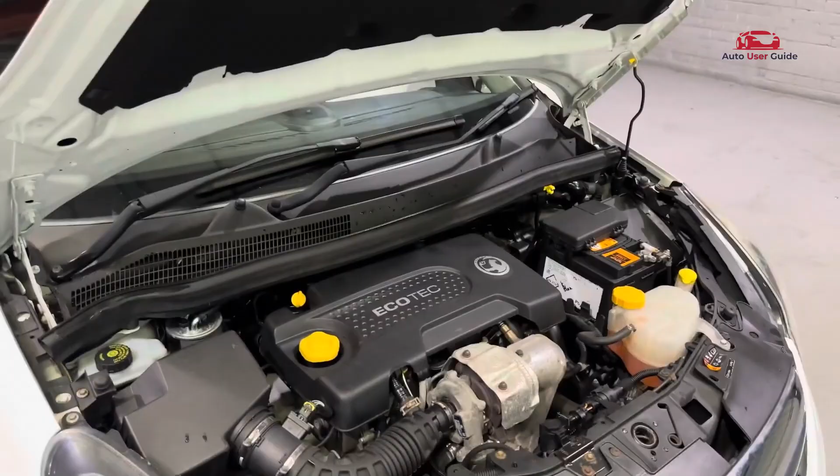Curious about the fuse box location and diagram for the Opel Corsa 2015 to 2019? Wondering where each fuse panel is and what its functions are? This guide answers all your questions, helping you easily locate and keep your car's electrical system safe and running smoothly.

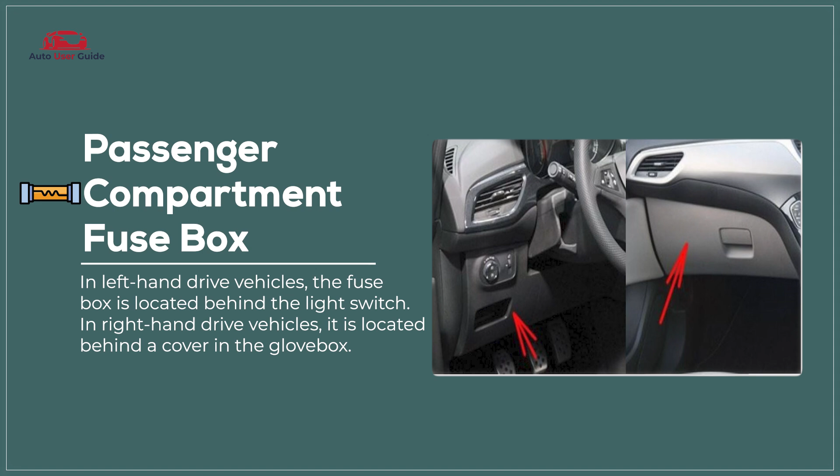Passenger compartment fuse box. The passenger compartment fuse box in the 2015 Opel Corsa controls and protects interior electrical systems such as power windows, infotainment, and climate control. It ensures consistent power delivery and reliable operation of cabin features.

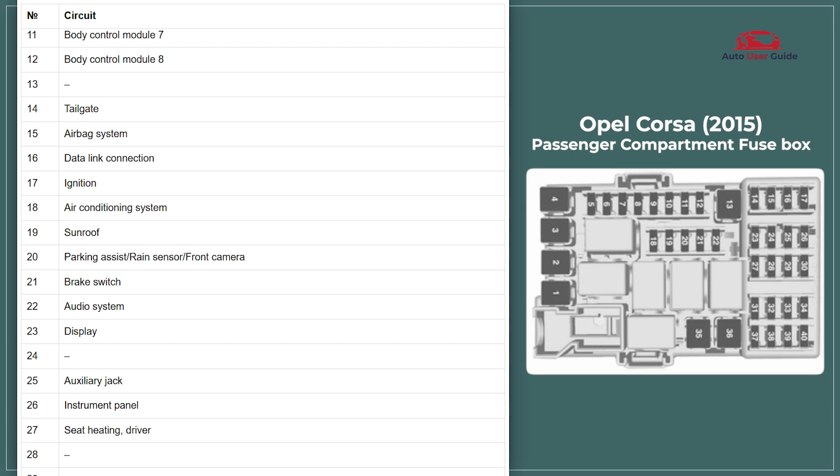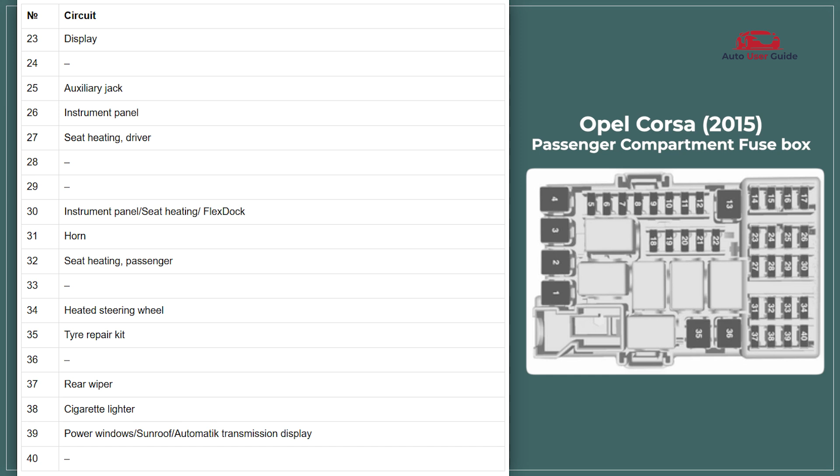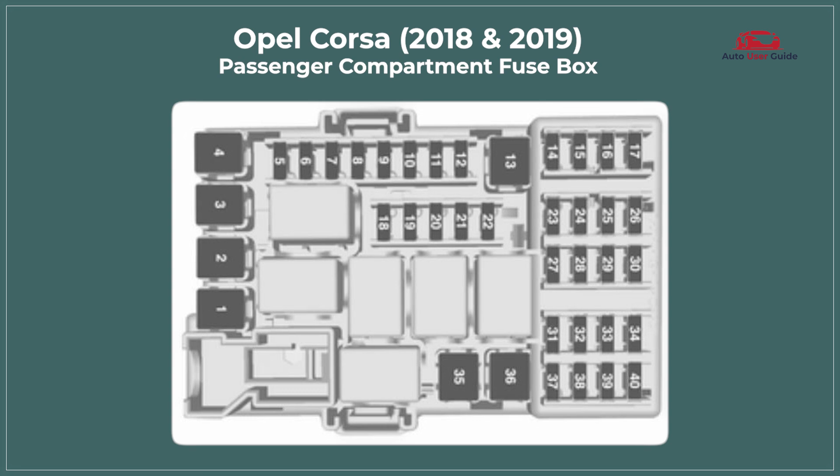The passenger compartment fuse box in the 2018 and 2019 Opel Corsa controls and protects interior electrical systems such as power windows, infotainment, and climate control. It ensures consistent power delivery and reliable operation of cabin features.

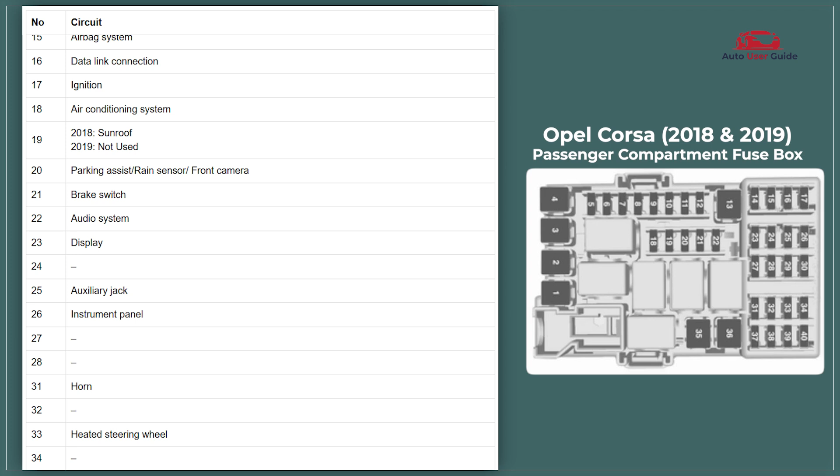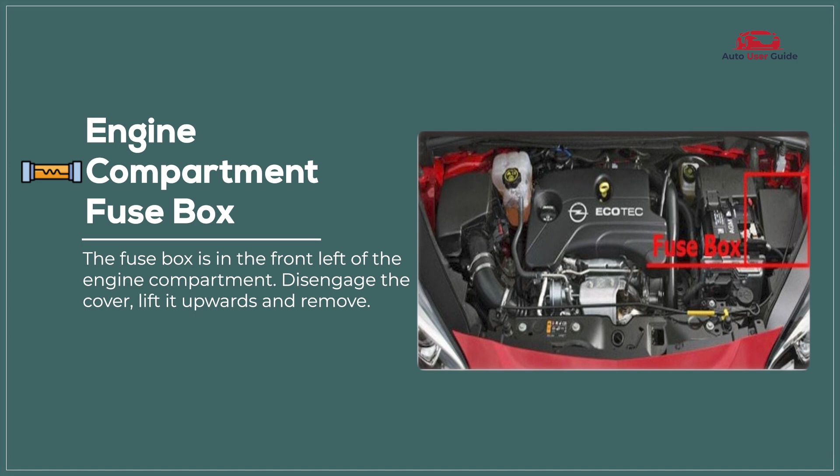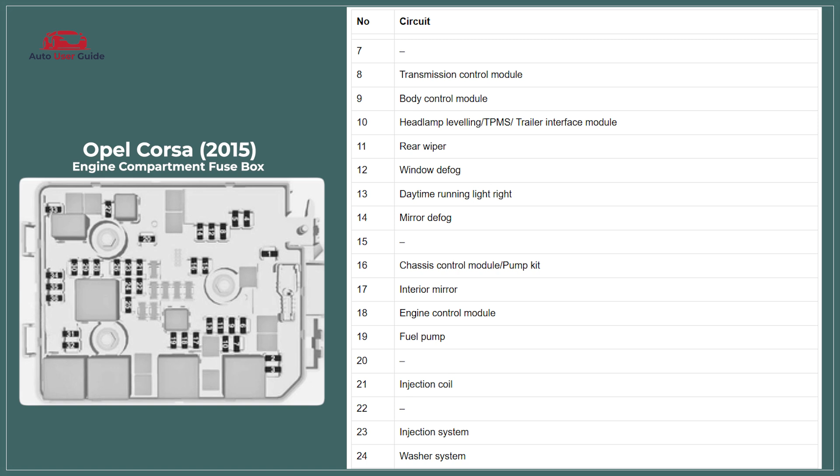Engine compartment fuse box. The engine compartment fuse box in the 2015 Opel Corsa safeguards vital engine and electrical systems, including ignition, lighting, and cooling circuits. It ensures efficient power distribution and dependable performance of essential components.

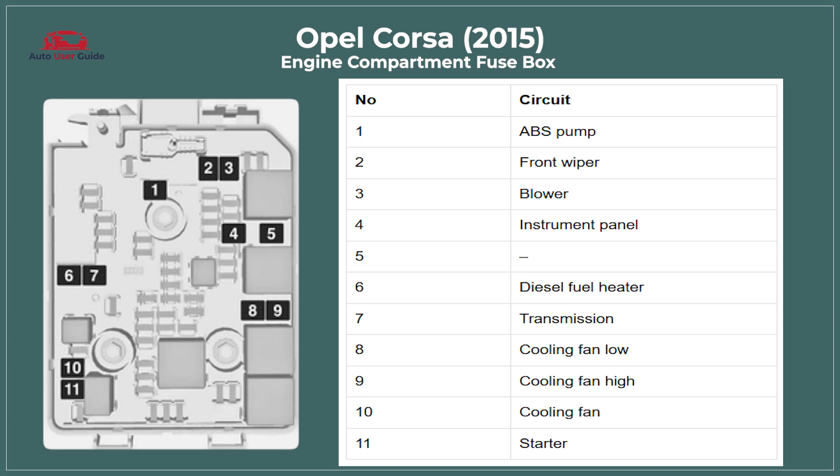The engine compartment fuse box in the 2015 Opel Corsa safeguards vital engine and electrical systems, including ignition, lighting, and cooling circuits. It ensures efficient power distribution and dependable performance of essential components.

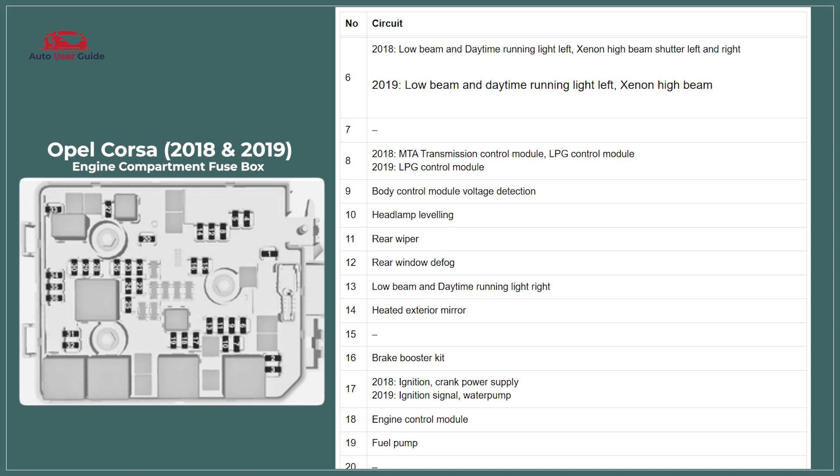The engine compartment fuse box in the 2018 and 2019 Opel Corsa safeguards vital engine and electrical systems, including ignition, lighting, and cooling circuits. It ensures efficient power distribution and dependable performance of essential components.

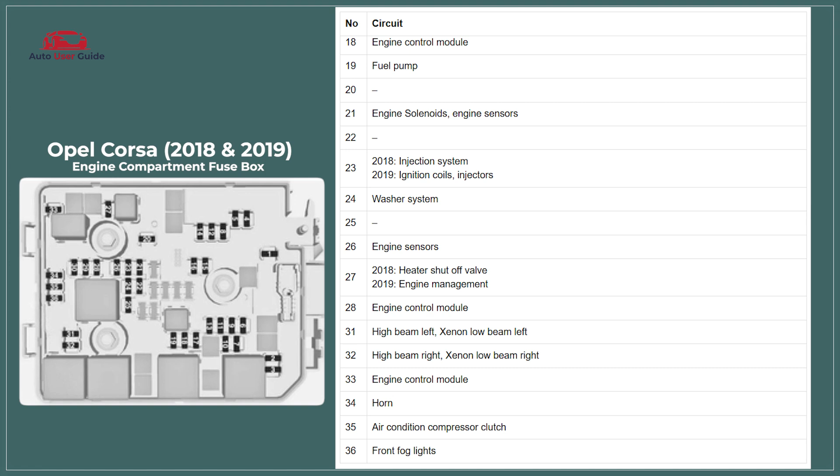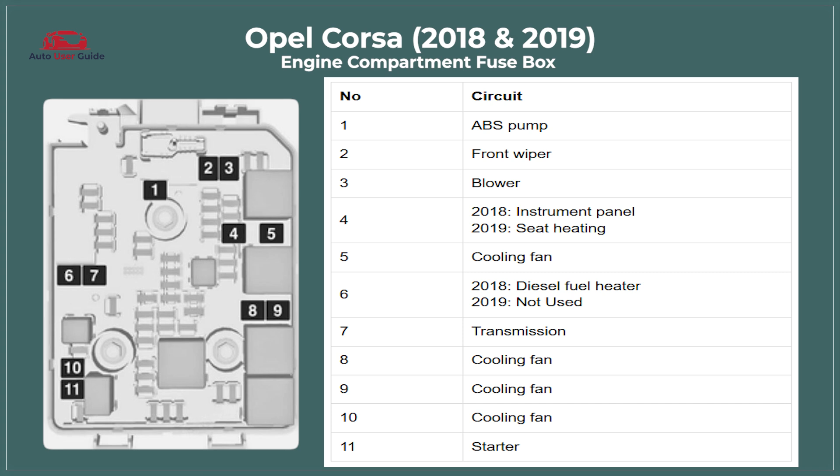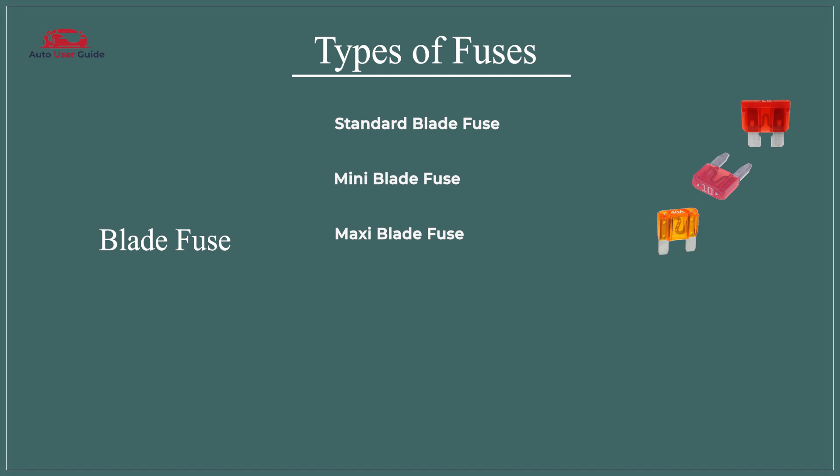Type of fuses: blade fuse, standard blade fuse, mini blade fuse, maxi blade fuse, micro 2 fuse, micro 3 fuse, J-case fuse.

Glass tube fuse, AGC fuse, SFE fuse. Ceramic fuse, Bosch fuse, DIN fuse. PAL fuse, low profile PAL fuse, standard PAL fuse.

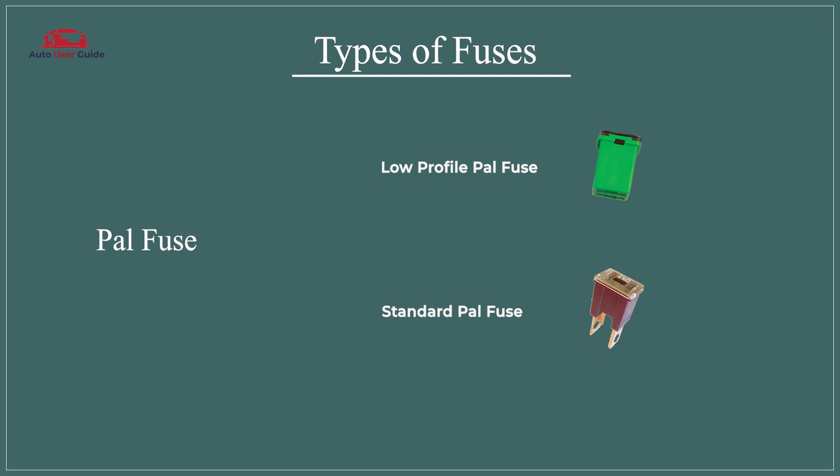Link fuse, mega fuse, high amperage link fuse.

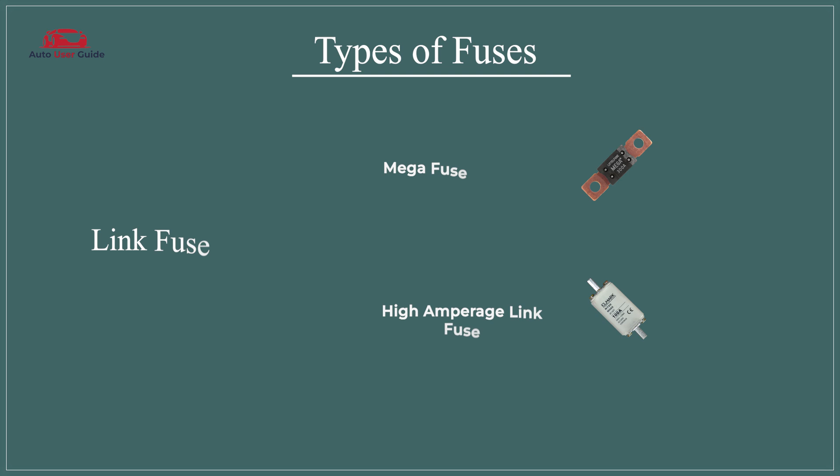Fuse conditions. Blown fuse: a blown fuse means it's no longer functioning and needs replacement, while a perfect fuse is in good working condition and performing as expected.

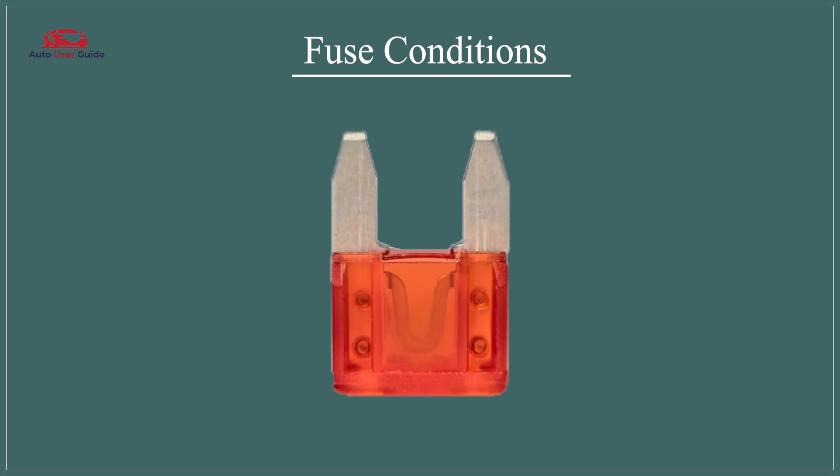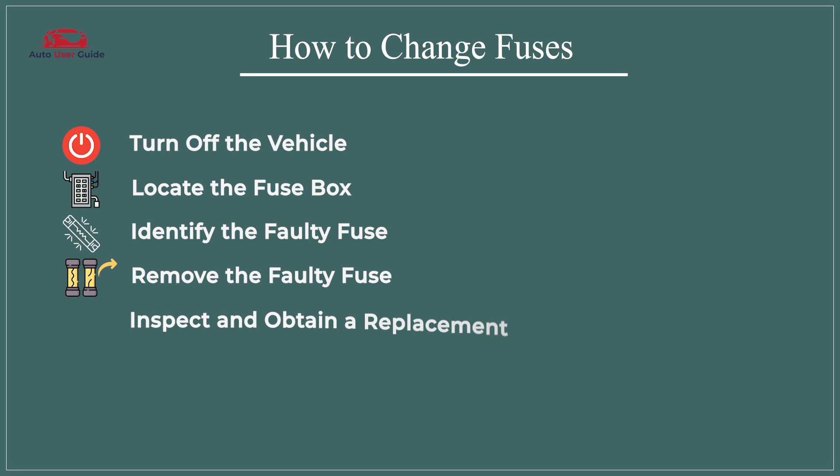How to change fuses: turn off the vehicle, locate the fuse box, identify the faulty fuse, remove the faulty fuse, inspect and obtain a replacement, install the new fuse, test the replacement.